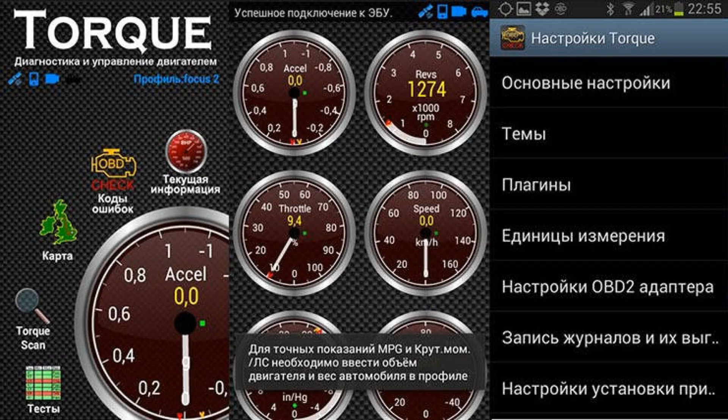Despite the emergence of a standardized protocol, there are currently several implementations of it, tied to one or another environmental standard. The CAN protocol, based on ISO 15765-4, is used for the latest generations of cars produced by Ford, Jaguar, Mercedes, Mazda, Nissan, Lexus, Toyota, Peugeot, Chrysler, Renault, Volkswagen, Porsche, Opel, Audi, Saab, Volvo, and other brands.

The ISO 14230-4 protocol, also called K-line, is valid for Korean cars such as Daewoo, Kia, and Hyundai, as well as Subaru STI, and a small number of Mercedes brand models.

ISO 9141-2 protocol is common in Japan—Honda, Acura, Lexus, Infiniti, Toyota, Nissan—and in Europe—BMW, Audi, Mini, Mercedes, Porsche. It is also used on early American cars: Dodge, Chrysler, Plymouth, Eagle.

The J1850 VPW protocol is used in the USA on Cadillac, Buick, Chrysler, Chevrolet, Hummer, Dodge, Oldsmobile, Isuzu, Pontiac. The PWM version of the J1850 protocol is used on Lincoln, Ford, Jaguar, and Mazda cars.

Diagnostic modes. Using the OBD-2 protocol allows you to perform, in addition to the actual diagnosis of faults, a number of other functions that can be grouped according to the following modes.

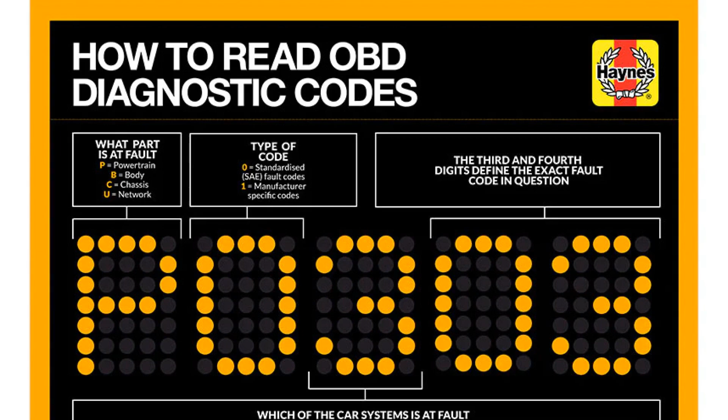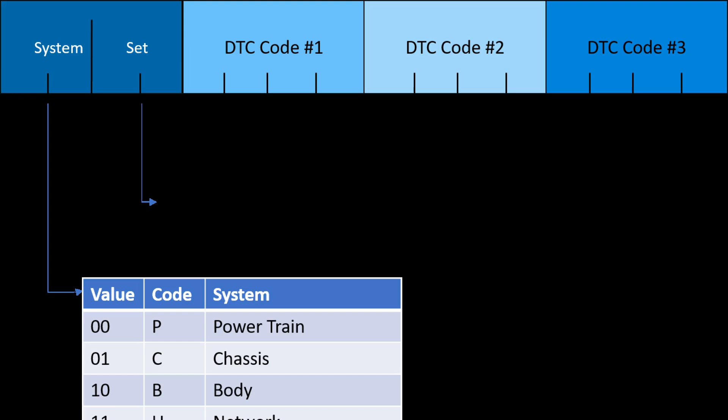P0130, oxygen sensor inoperative, first bank. P0131/P0132, DK voltage level is unacceptably low/high, first bank. P0133, DK has unacceptably high response time, first bank. P0134, DK is inoperable, first bank. P0135/P0136, DK1, DK2 heating circuit is inoperable, first bank. P0137/P0138, unacceptably low/high voltage level of DK2 heating circuit, first bank. P0139, DK2 heating circuit has unacceptably high response time, first bank.

P0140/P0141, DK1/DK2 heating circuit is inoperable, first bank. P0142, DK3 heating circuit is inoperable, first bank. P0143/P0144, DK3 heating circuit voltage level is unacceptably low/high, first bank. P0145, DK3 has unacceptably high response time, first bank. P0146, DK3 is defective, first bank. P0147, DK3 heating circuit is inoperable, first bank. P0150, DK1 circuit inoperable, second bank.

P0151/P0152, DK voltage level is unacceptably low/high, second bank. P0153, DK has unacceptably high response time, second bank. P0154, DK is inoperable, second bank. P0155/P0156, DK1, DK2 heating circuit is inoperable, second bank.

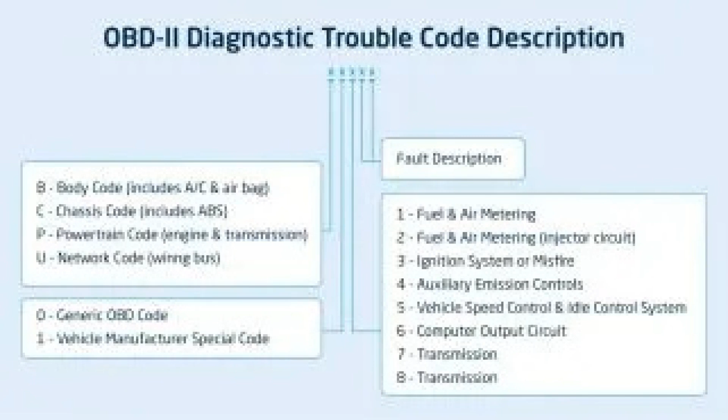P0157/P0158, voltage level of DK2 circuit, second bank, is unacceptably low/high. P0159, DK2 heating circuit has unacceptably high response time, second bank. P0160/P0161, DK2 heating circuit is inoperable, DK2 is defective, second bank. P0162, DK3 heating circuit inoperable, second bank.

P0163/P0164, unacceptably low/high voltage level detected in DK3 heating circuit, second bank. P0165, DK3 has unacceptably high response time, second bank. P0166, DK3 is defective, second bank. P0167, DK3 heating circuit is inoperable, second bank. P0170, fuel air mixture composition is incorrectly balanced, first bank.

P0171/P0172, poor/rich fuel mixture, first bank. P0173, fuel air mixture composition is not balanced correctly, second bank. P0174/P0175, poor/rich fuel mixture, second bank. P0176, fuel mixture sensor circuit is inoperable.

P0196. DTM is not calibrated correctly. P0197/P0198. DTM readings are unacceptably low/high. P0199. DTM defective. P0200. Injector control circuit is inoperable. P0201-P0212. Injector control circuit number 1-12 inoperable.

P0213/P0214. Cold start injector #1/2 is inoperable. P0215. Powertrain shutdown solenoid inoperable. P0216. Injection timing control circuit inoperable. P0217. Motor overheating detected. P0218. Transmission overheating detected. P0219. Crankshaft rotation speed exceeds the upper permissible limit.

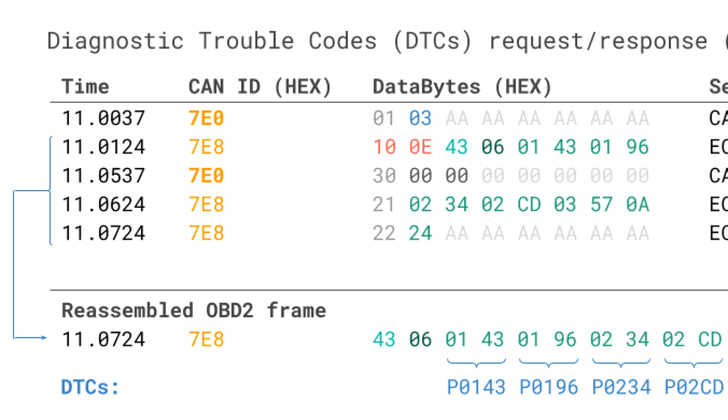P0230. Gasoline pump control circuit 1 is inoperable. P0231/P0232. Gasoline pump circuit 2 is unacceptably low/high. P0233. Gasoline pump circuit 2 is inoperable. P0235. Turbocharger pressure sensor circuit A is inoperable. P0236. DDTA signal level is out of acceptable range. P0237/P0238. DDTA reading is unacceptably low/high.

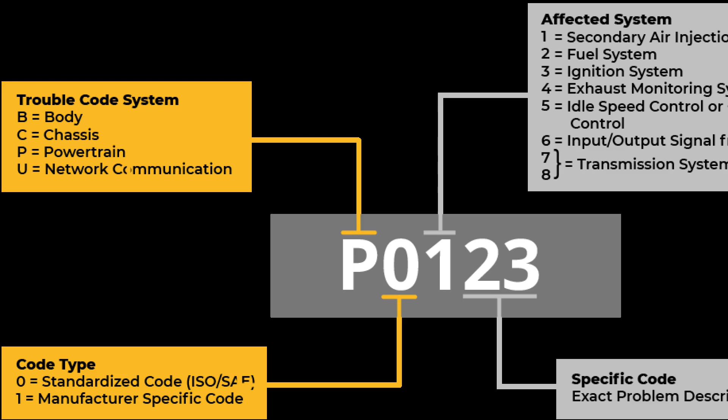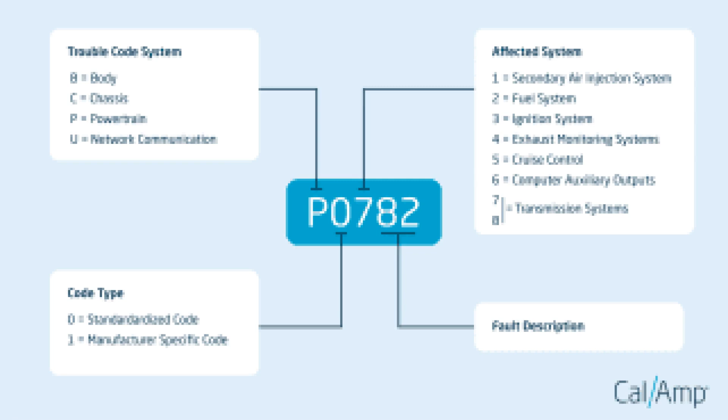P0326. No. 1 detonation sensor is not calibrated correctly. First bank. P0327/P0328. Low/high reading of DD number 1. First bank. P0329. DD No. 1, first bank, is defective. P0330. Detonation sensor circuit number 2 is inoperable. Second bank. P0331. DD No. 2 is not calibrated correctly. Second bank.

In conclusion, understanding the nuances of decoding OBD-2 diagnostic error codes is essential for effective vehicle maintenance and troubleshooting. By familiarizing yourself with the various codes and their meanings, you can save time and money while ensuring your vehicle runs smoothly. Remember, while these codes provide valuable insights, they are just the starting point for diagnosing issues. Always consider the broader context of your vehicle's performance and consult a professional when necessary. With this knowledge, you can take a proactive approach to vehicle care and enhance your driving experience.